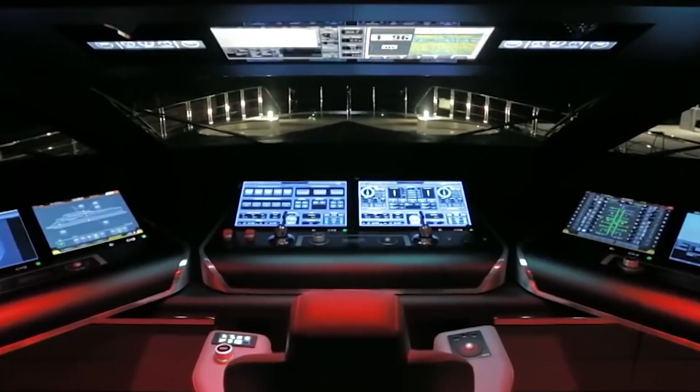Before we set sail, there are two things you must know. First, the Tesla yacht is a breathtaking work of marine engineering marvel. It's like art and science had a seaborn baby, and frankly, I am not surprised. Tesla has shown that they not only innovate in their approach to machinery, they are also precise when it comes to their style.

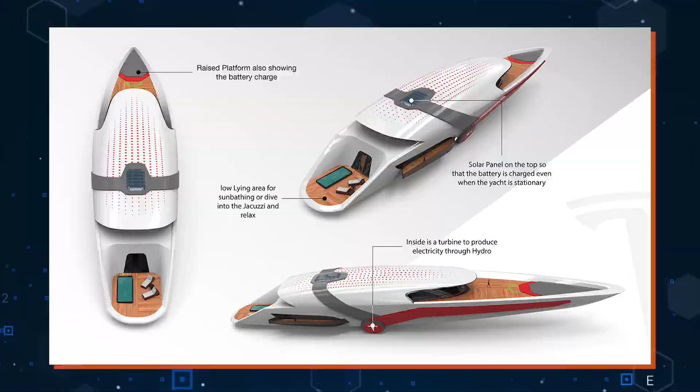We'll talk about it more in a second, but we need to address the second point: there is no Tesla yacht, at least not at the moment, and I promise you this isn't some clickbait rabbit hole. This is not a scam. The fact is, designs of the yacht exist. At the moment it's still going through its conceptual phase in the hands of Dhruv Prasad, a designer who worked in the Tesla design team in the past. So bear that in mind as we dive into the details of this beautiful beast.

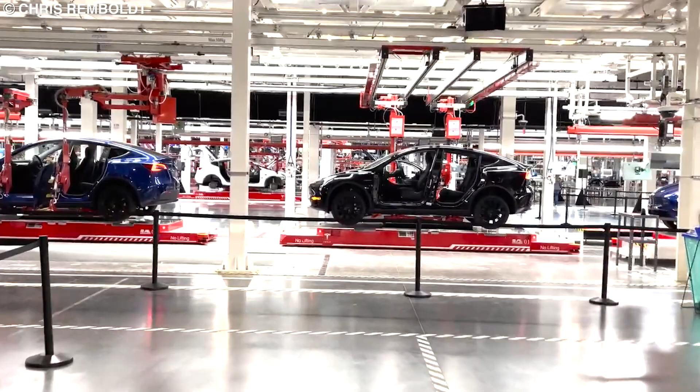Good? Good. Now let's begin. Tesla has had its fair share of curious ventures in its relatively short history. Ever since they came onto the scene in the early 2000s, and ever since Musk took control of the company, we've seen everything from electric cars to futuristic-looking pickup trucks to creating an entire energy-focused subdivision that's threatened to redefine how we consume power. So if you take all of that into consideration, it's not all that far-fetched that the electric car company would try their hand at an electric yacht.

The Tesla yacht is quirky and stunning. Quirky because designer Dhruv Prasad took major inspiration from the shape of a giant squid when creating its sleek-looking structure. And stunning because, unlike other yachts out there, this one will be as quiet as anything with a Tesla logo should be.

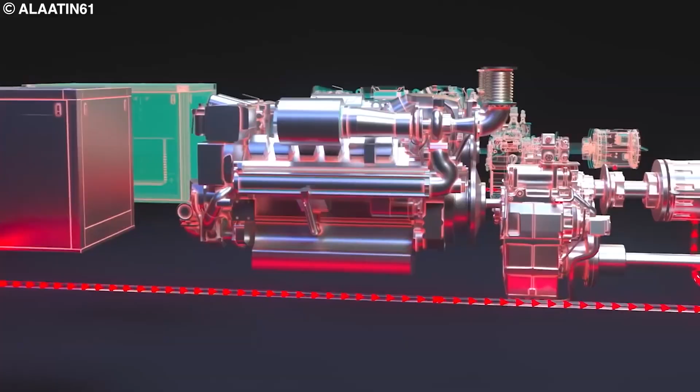Oh, you had no idea yachts are noisy. Well, here's a reference for you for educational purposes, and this is from a small one. The reason the Tesla yacht won't sound like that is all thanks to the electric machinery powering it, and we will talk about it in a bit.

We'll also cover for who and why it was designed in the first place, but for now, let's jump into the stuff people love to see: specs, exteriors, and interior. Based on the designs, the Tesla yacht will be sleek and incredibly modern.

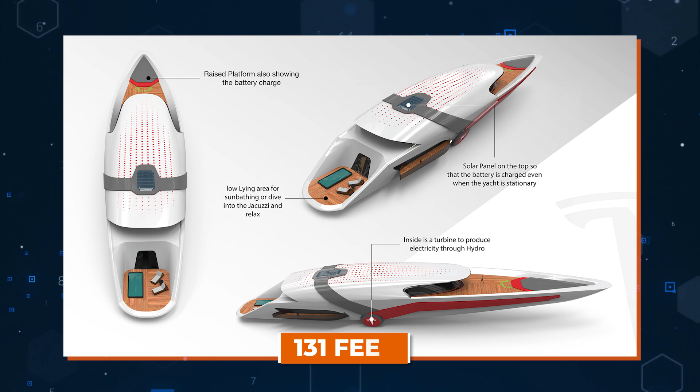The Tesla SuperYacht will measure a very economical 131 feet, or 40 meters, across its entire length. By contrast, this is a little troubling, because if you know anything about yachts, these dimensions are incredibly short by any standard, especially for a yacht that would supposedly cost $700 million.

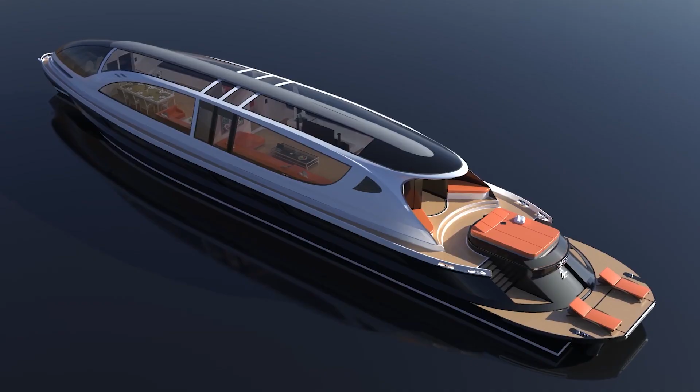Well, the answer is simple: its price tag. I don't think I know anyone who can afford a $700 million yacht, and I know quite a lot of people. But we're not done yet.

Things get a little more interesting, because aside from its surprisingly brief length and despite its 9-figure valuation, the super yacht houses only 2 decks and 4 lounges. 2 decks, that's a bummer. I mean, if you aren't already reeling in shock and stuttering in disbelief like me, then you might know what this means. But don't worry, I'll break it down.

If we choose to rank yachts based on how much they cost, the Tesla yacht would rank above Azzam, a $600 million ship owned by an Abu Dhabi billionaire. And despite costing $100 million less, the Azzam has 7 decks and 50 suites. That's at least 3 times more decks and many times more interior space than the Tesla yacht offers.

Okay, so I'll step into the shoes of a Tesla superfan for a second and say it's probably just a question of exclusivity. This could be a yacht for introverted billionaires. Maybe whoever buys it is the type that won't want visitors, wants to keep it small, call it a private super yacht. That would make sense. Good? Good.

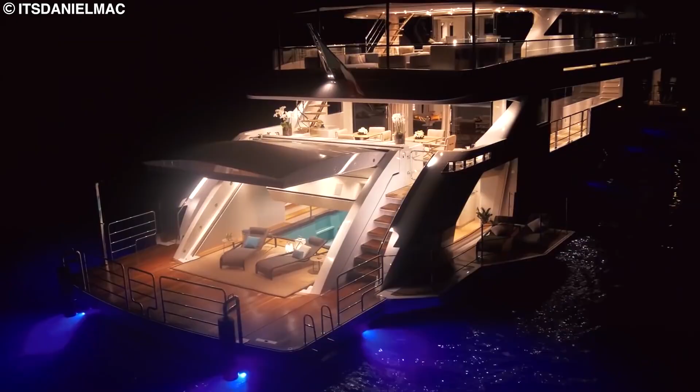Now, beyond its insane price tag and economical space, it also sports a deceptively narrow design that makes it both stylish and aerodynamic. But more importantly, it allows it to move faster in the water while retaining its stunning appearance. It also has a sharp, narrow tip with a flat, wide end opening to one of its lounges. And it has large panoramic windows that run almost the entire length of the craft, illuminating its interiors with natural lighting while giving anyone that can afford to own it a breathtaking view of the sunset.

The Tesla yacht will also feature a unique, luxurious, and modern interior. The upper deck will feature a massive open space that can be used for anything from massive parties to events. There will also be a bar and a convenient sitting area, a large TV screen on one end, and a massive solar panel that feeds power to the entire boat.

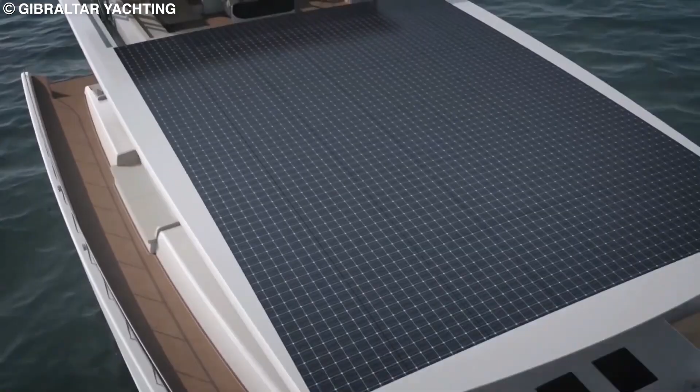More on that later. The other end will hold the battery indicator, and both can be sheltered from strong weather conditions with a controlled shutter door.

There will also be a lounge area at the stern that comes with comfortable deck chairs and a jacuzzi. Within, there are 2 bedrooms which will be furnished luxuriously according to the tastes of the Tesla brand.

Obviously there will also be spaces for the cabin crew, a kitchen, a swimming pool, and bathrooms. The lower deck will share a lot of features with the upper deck, including a living area with seats hidden in tables that pop out at the push of a button.

And finally, it will also come with a fully furnished spa, along with massage tables and a steam room that brings another notch of luxury to the yacht.

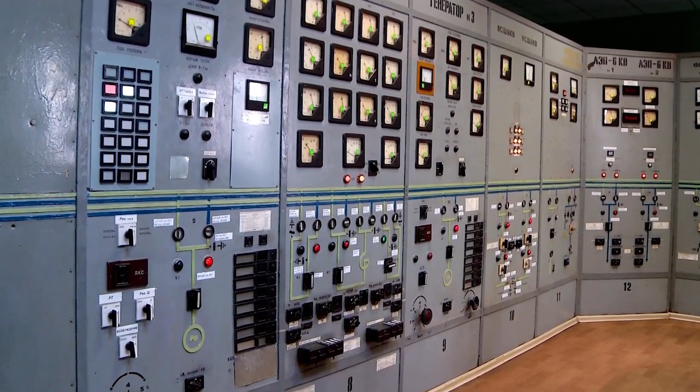A lot of features are still under wraps, and there is still a lot that will be revealed with time, but for now you can be sure that Tesla will go all out on the power system. They have enough experience that would give them an advantage to set them ahead of the game.

That advantage is their history of making sustainable electric power systems that have powered not only electric cars all over the world, but thousands of homes across America.

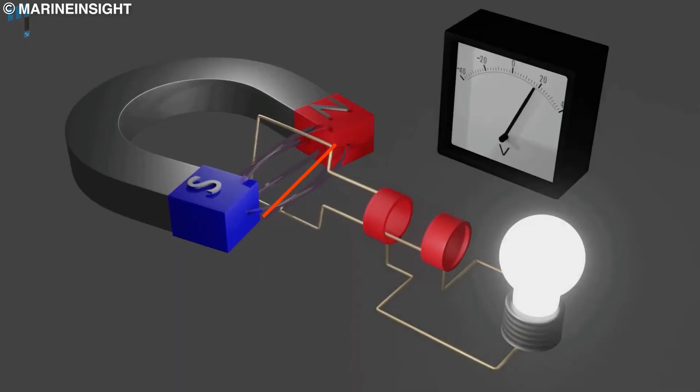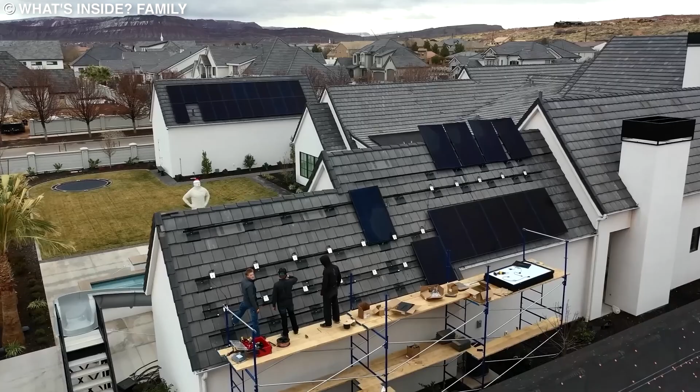With their energy-focused subdivision, Tesla has introduced a range of energy products like the Powerwall that have disrupted the traditional energy industry. Devices like the Powerwall store energy generated from solar panels or grids for its users to utilize in down periods or in the event of an outage.

It is clean and efficient, two things that yacht builders all over the world have struggled with. Millions have been spent on research and development, but it seems Tesla might be the ones to crack the code.

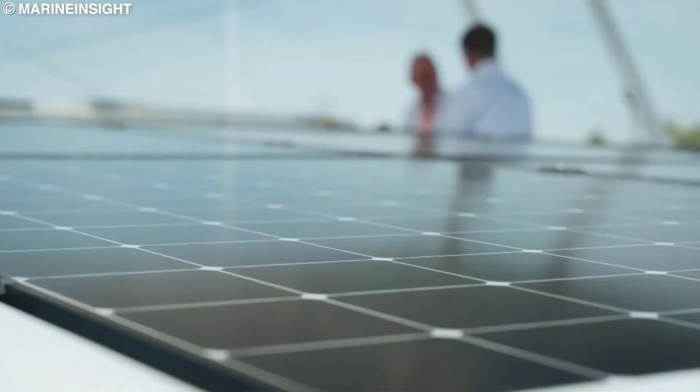Their eco-friendly power systems will not only make the yachts safe for the waters, but it will also prevent the vessel's engines from hydrolocking. Hydrolocks happen when a yacht's motor engine gets too much water in them. But since the design ensures that the yacht won't have any openings that the blue seas could exploit, the vessel will be safe from that.

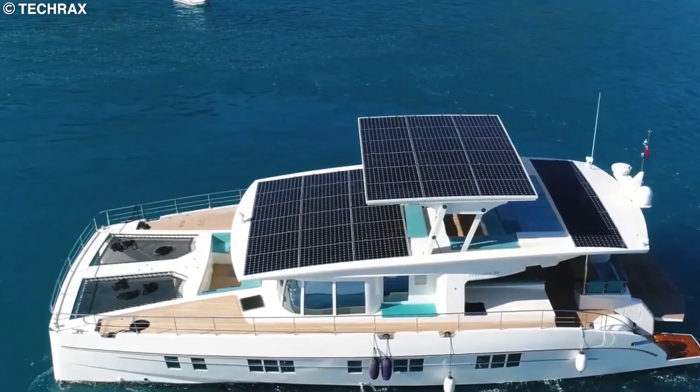At the very top of the yacht will sit a customized solar panel, which will be enough to charge the battery even while the yacht is stationary.

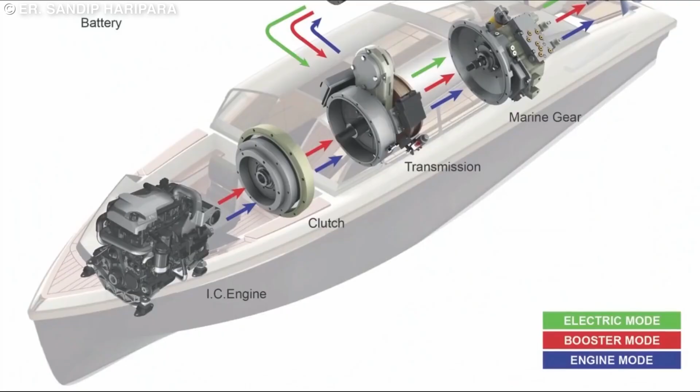And at the bottom, there will be turbines that can drive the yacht to speeds of up to 70 knots by producing hydroelectricity, which will be circulated through to power the yacht and charge the battery. This loop mimics the system you find in Tesla electric vehicles, making each one a powerful energy generator and conserver.

This also means that the yacht can eliminate the cost of fuel, making sure that it never gets stranded in the middle of the sea.

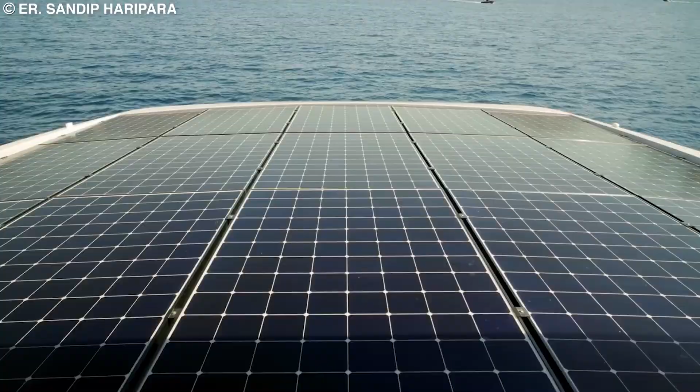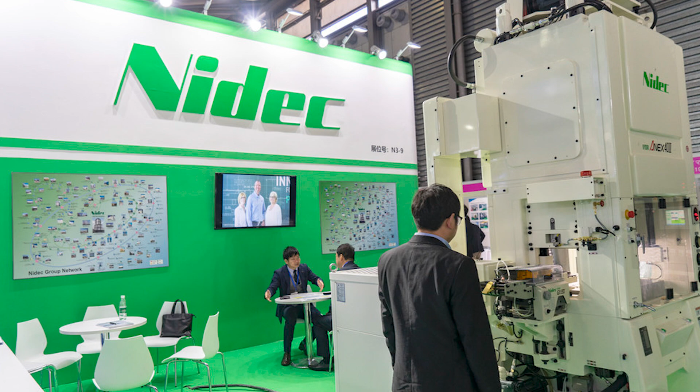Now, you must know that if this yacht ever sees the light of day, it won't be the first, at least from a technical perspective. In 2021, Nidec, a Japanese company in the electric motor industry, reported that it installed an electric power system in a 165-foot yacht, and it had worked just fine.

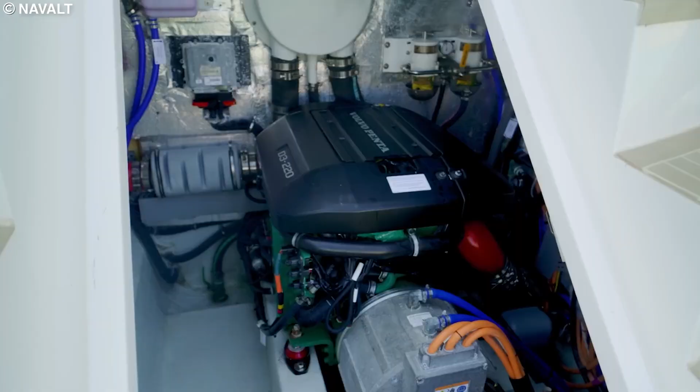But in the same breath, Dr. Charles Kuhlmann, a lead engineer at Tesla, has also tweaked his personal yacht, an Elan GT5, to an electric vessel. So it's becoming a growing trend that might just need a heavyweight like Tesla to finally make a technological statement.

Can you see now why the concept of an electric yacht is not so far-fetched? At least not with people like Dr. Charles on the Tesla team.

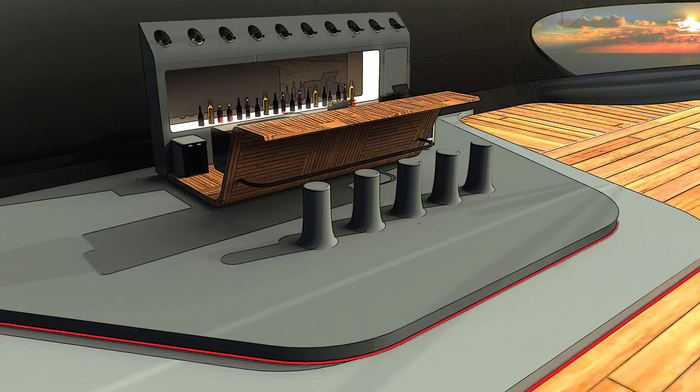Okay, it's time to address the price tag because I don't think we've spoken enough about it. $700 million is a whole lot of money. There, I said it. I've made calls, and I still don't think I have friends that can afford this.

Truth is, there aren't many yachts in the world that have gone past that price point. In fact, if you're counting yachts that actually exist, there is only one, Roman Abramovich's Eclipse, and it costs an astronomical $1.5 billion for reasons we cannot begin to break down in this video.

So in what universe do we see Elon making a Tesla ship this expensive? Personally, I think there is a chance. But take everything we've said here with two grains of salt because I think most, if not all, the specs will change.

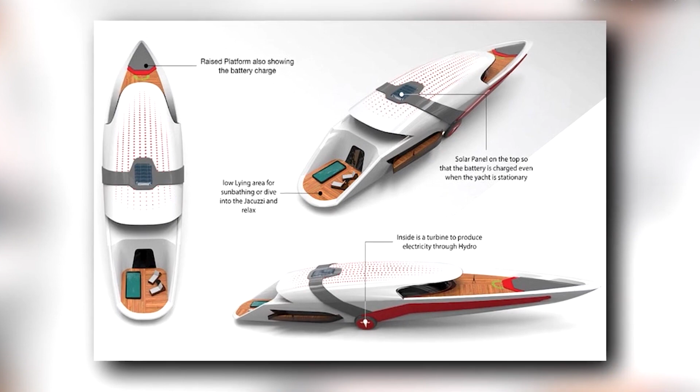The boat will be longer, the price tag might be lower, the innovation more revolutionary and precise. Like I said, a lot will change.

And maybe that's why Elon hasn't publicly endorsed or even made a comment about the $700 million Tesla yacht. Wait, so does that mean the yacht might never happen?

Not so fast. Elon has also not disowned the yacht, and this is odd because when you consider the fact that the Tesla boss is the internet's biggest troll, you'll know that there is no way he hasn't heard of the concept yacht. And this also means that his silence is a deliberate choice.

Another reason why I'm sure Elon is aware of this uber-expensive electric sea vessel is because Dhruv Prasad, the man behind the concept yacht, has worked with Tesla's product design team in the past. He most certainly falls somewhere under Musk's radar.

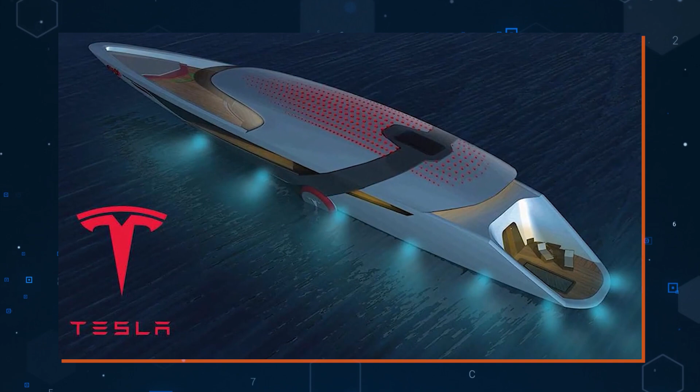So while Elon allegedly has had little to nothing to do with the design or ideation of Prasad's concept Tesla yacht, I wouldn't be too surprised if one day we have an electric sea beast under the Tesla banner quietly cruising the open seas.